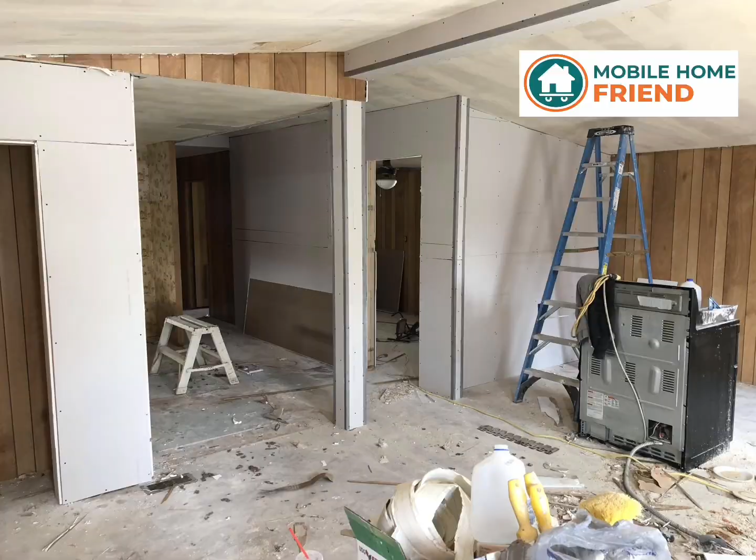Welcome to another deep dive from Mobile Home Friend. Today, we're getting into what is, without a doubt, the biggest hidden risk for any investor looking at mobile homes on private land. We're talking about utility installation costs. And this is all based on our latest research over at mobilehomefriend.com.

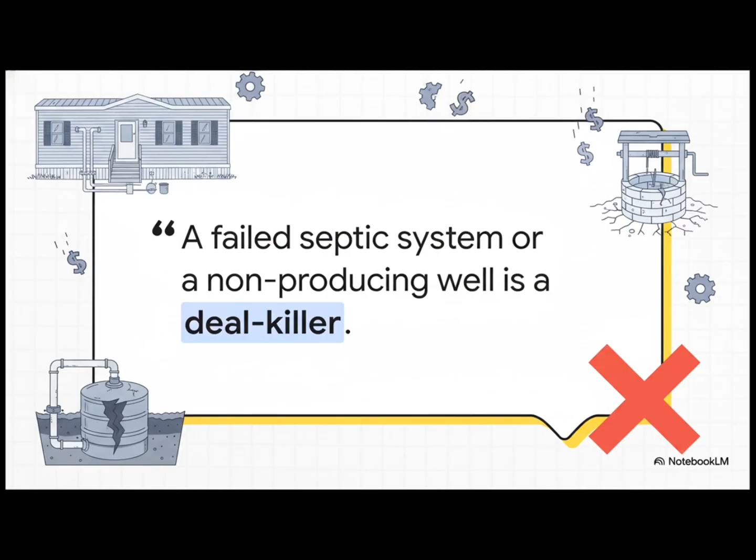We wanted to put this right up front because it is the absolute truth. Look, a failed septic system or a well that's gone dry, that's not just some minor inconvenience. It is a straight-up deal killer. It can completely vaporize your profits and then some.

And this is the number that shows you just how serious we are. We're talking about a potential hit of anywhere from $10,000 to over $40,000. That is a massive variable that can flip a fantastic deal into an absolute financial nightmare if you walk in unprepared.

So let's break that down. What actually makes this a potential $40,000 deal killer? Well, unlike a house in the city where you just pay a utility bill, on private land, you are the utility company. You own the whole infrastructure. That septic tank, that water well, they're your problem. They're complex little mechanical systems. And when one of them goes down, trust me, the bill lands right in your lap.

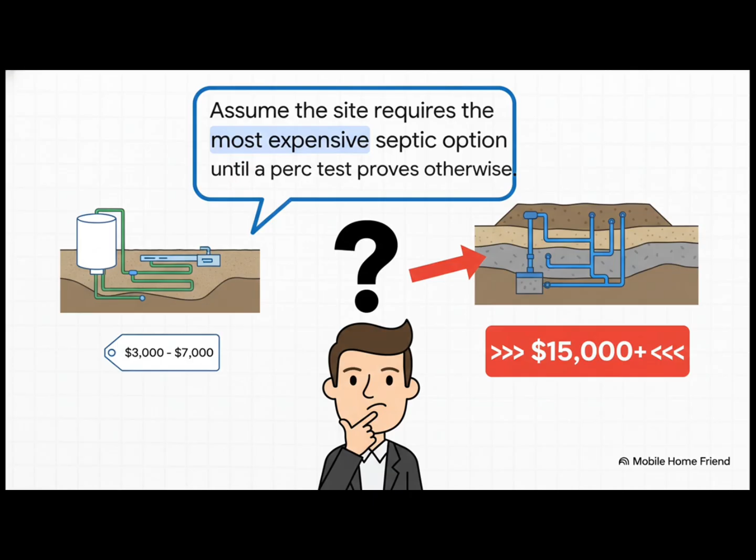And that brings us to what is maybe the single most important rule of thumb you need to burn into your brain. You have to go into every single deal assuming the site requires the most expensive option. Assume the worst, budget for the worst, until a pro can come in and prove, with a test, that you can get away with something cheaper.

Okay, let's dig into the first big one, the septic system. Now, a lot of people think, logically, that the cost is tied to the size of the home, right? Bigger home, bigger system, bigger cost. Nope. It has almost nothing to do with the house. It is all about the ground it sits on, the soil. That is the one thing that dictates the price tag.

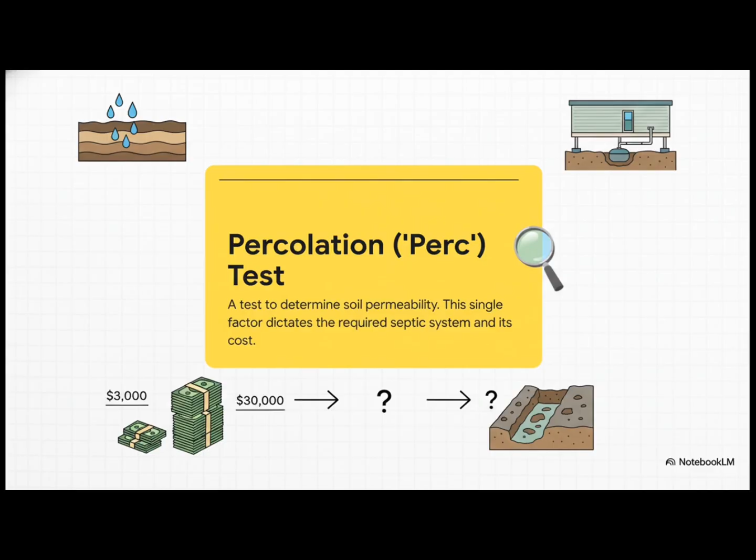And this is how you figure it out. It's called a percolation test, or what everyone in the business just calls a perc test. Basically, a soil expert comes out and sees how fast water drains through the soil. And the result of that one single test is what determines if you're writing a check for $3,000 or $30,000. It is that critical.

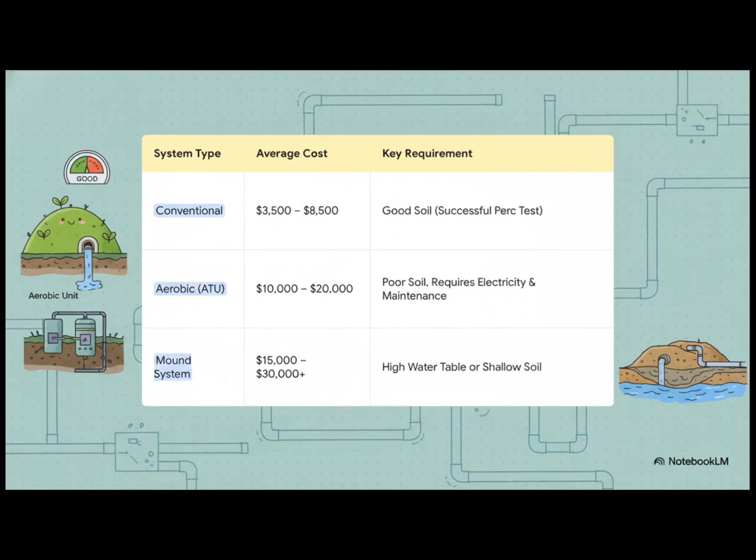Right, and this chart basically lays out the 3 roads you can go down. If you get lucky and the perc test comes back great, you can install a simple, relatively cheap conventional system. But if that soil is no good, the health department is going to legally require you to install a much more complex and expensive system, like an aerobic unit, or, for the really tough lots, a huge mound system. By the way, we have a full cost comparison chart breaking all this down in the article over on mobilehomefriend.com.

So let's just hammer this point home. This is a non-negotiable directive for you as an investor. You never buy a property that needs a septic system without a current, successful perc test in your hands. Don't rely on some test from 5 years ago or what the seller says. A failed perc test doesn't just mean you spend more money. In some counties, it can literally make the land unbuildable. Game over. Your investment is worthless.

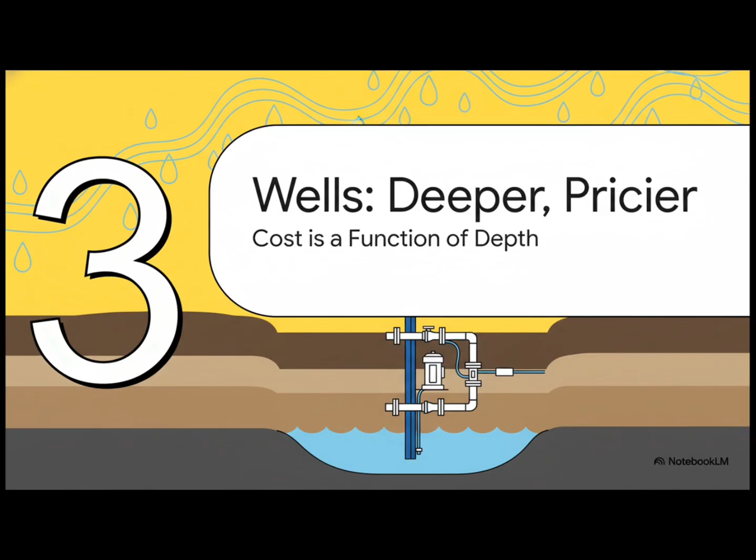All right, so that's septic. Let's pivot now to the other half of this puzzle, your water well. Now, the good news here is that unlike septic systems with all their soil variables, the cost of a well is a lot more straightforward. It really just comes down to one main thing: how deep do they have to drill?

It's best to think about the total cost in 2 separate buckets. First, you've got the drilling and the casing. That's the pipe that lines the hole. That cost is variable, priced by the foot. The deeper they go, the more you pay.

The second bucket is a more or less fixed cost for all the hardware: the pump itself, the pressure tank, the electrical stuff. You've got to make sure you're budgeting for both pieces.

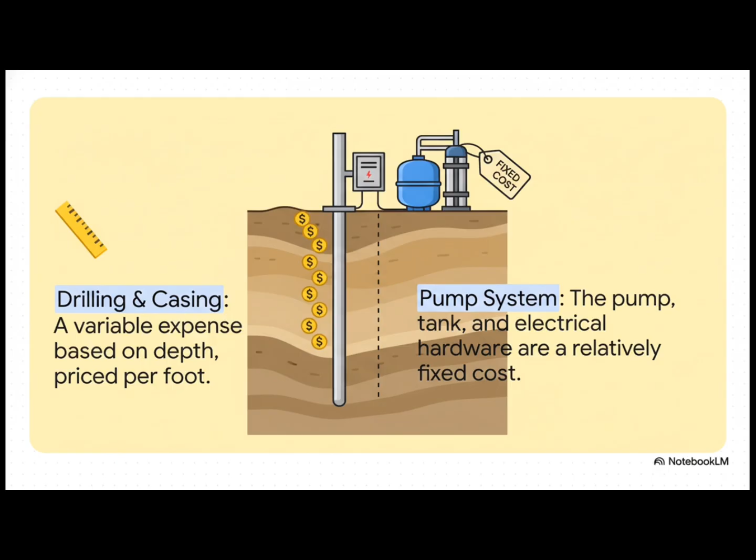You can see that per foot cost right here. It can vary a whole lot depending on your area. The average is around $47.50 a foot. But if you're drilling through solid rock or the property is way out in the middle of nowhere, yeah, you can easily see that price tag climb.

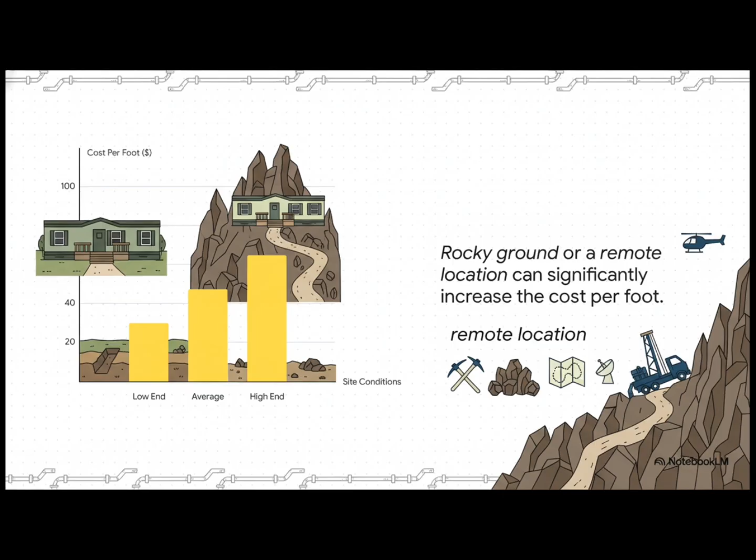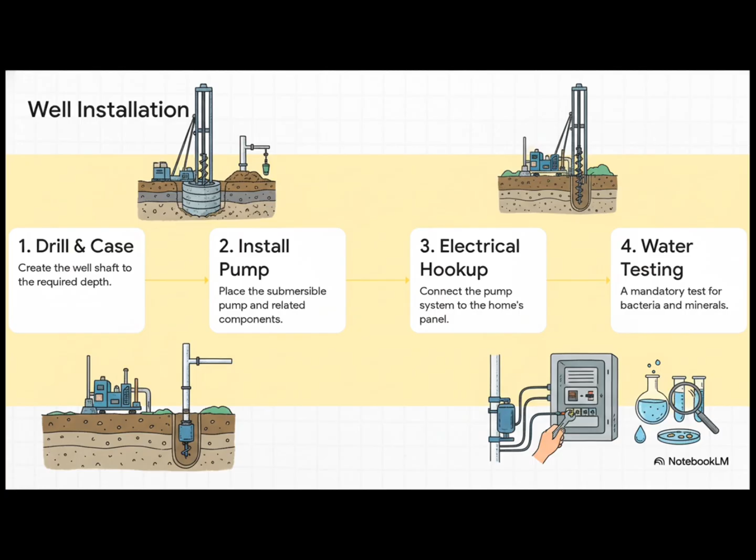You can easily see that price tag climb up to the high end, $65 a foot, maybe even more. So the whole process is pretty logical. It basically follows these 4 steps. First, the drillers show up and do their thing, drill the hole, put in the casing. Next, the pump system gets installed down in the well. Then an electrician comes out to hook everything up to your panel. And finally, and this is absolutely not optional, the water gets tested by a lab to make sure it's actually safe to drink.

Here's another really important directive for investors. Just because the lab says the water is safe doesn't mean it's good. Well water can be loaded with minerals, iron, calcium, that hard water stuff, and that will absolutely stain your sinks and toilets and destroy your appliances over time. So budgeting for a whole house filtration system isn't a luxury, it's a must do to protect the value of your property.

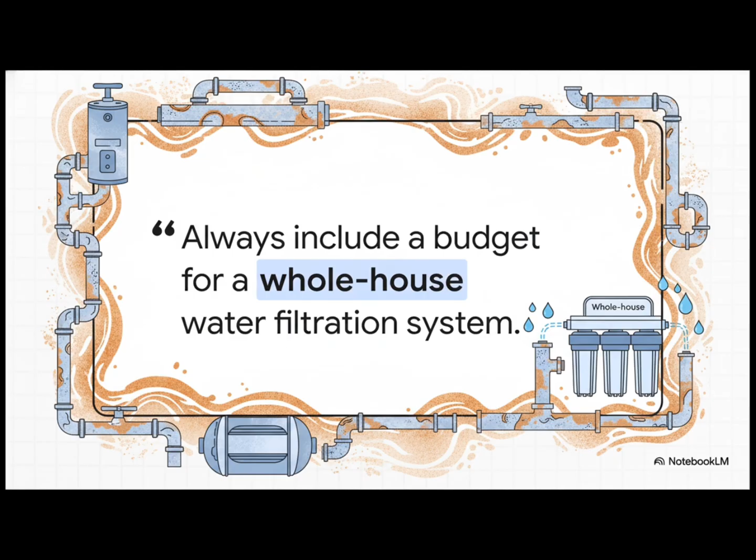Okay, so we've talked about all the risks, right? The big scary numbers. So how do you actually protect yourself? Well, let's get into the really practical part here. This is your non-negotiable checklist. These are the things you have to do before you close on the property to take the risk out of the deal. And look, this isn't just a friendly suggestion list. These are line items for your due diligence budget.

You've got the perc test. You might need an engineering design for the septic. You absolutely have to pay for health department permits. And you got to find a licensed contractor and budget for excavation. None of this is optional.

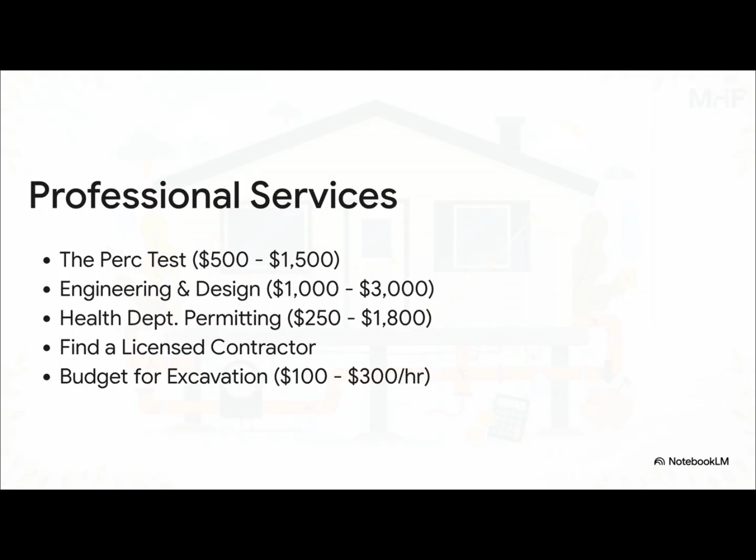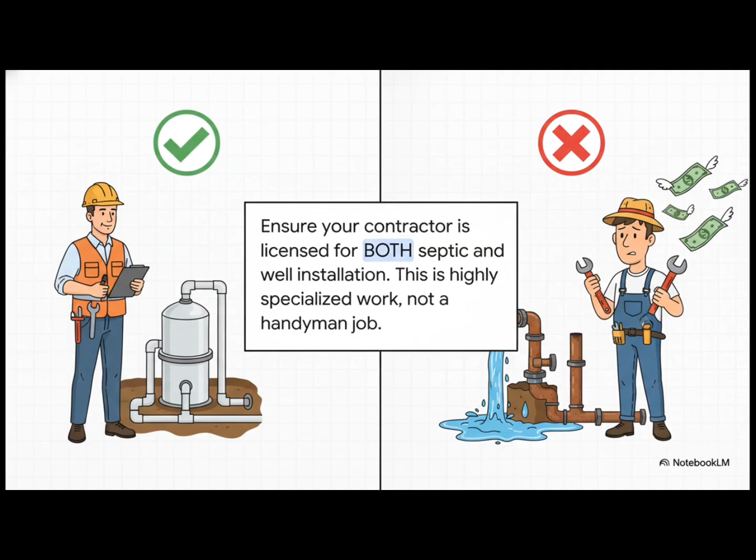And please, a huge warning on this one. Make sure your contractor is licensed for both septic and well work. This is not a job for a general handyman. This is highly specialized, highly regulated stuff. If you use someone who isn't licensed, you are opening yourself up to massive liability, and chances are the county will make you pay a licensed pro to rip it all out and do it all over again. It's just not worth the risk.

Okay, let's start to wrap this up: protecting your profit margin. See, all this due diligence, it's not just about avoiding a catastrophe. It's about actively protecting your bottom line. When you have this knowledge, you have the leverage. You can negotiate smarter, and you can budget with real, actual numbers.

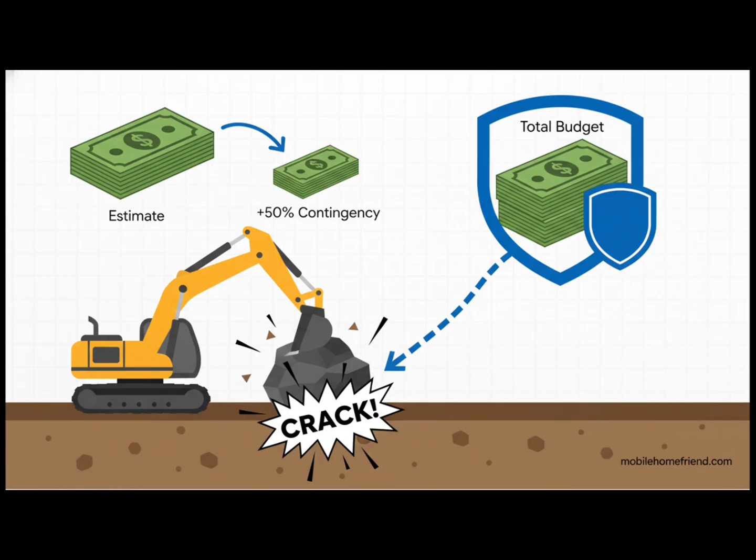And remember that rule of thumb we talked about? Here's the final version of it. Whatever your contractor gives you as a low estimate, you need to tack on a 50% contingency fund, always. Because I promise you, something will go wrong. They're going to hit a giant rock, the soil will be different 10 feet down, something. That buffer is what keeps a surprise from wrecking your entire profit.

So that's really the question it all boils down to, isn't it? Is this property a hidden gem, or is it a future money pit just waiting to swallow your cash? By following these steps, getting the tests done, truly understanding the costs, budgeting for the worst, you'll have the answer. You can walk into that deal with confidence, knowing exactly what you're getting into.